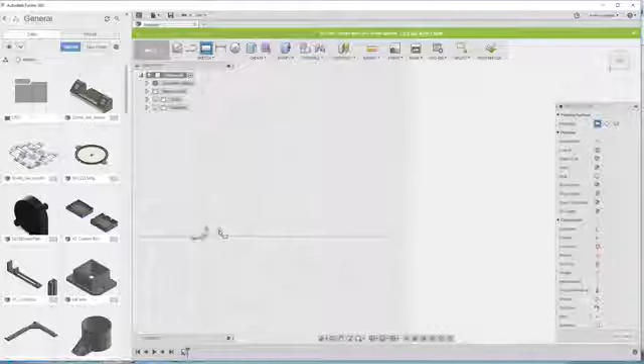First thing I'm going to do is change my document settings. I'm going to set it to inches. That'll make things a little easier to sort out.

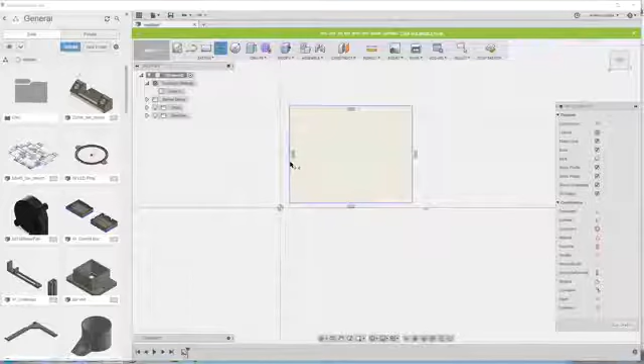So I'm going to use my dimension tool for the rectangle I've drawn, and I'll click on the left side. I have an XXL, so maybe I want to make a 30-inch by 30-inch wasteboard. So I'll type in 30 inches there, and I'll click on the top line here, drag up a little bit, and type in 30 inches here.

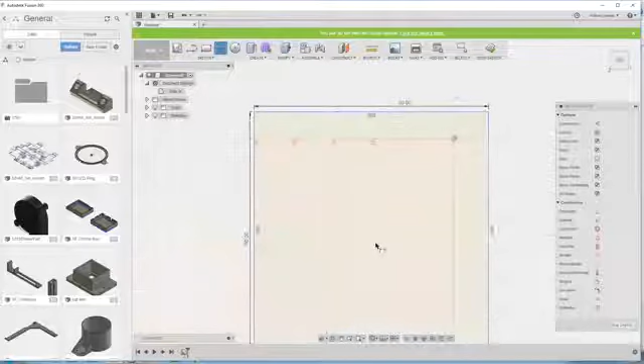So I've now created a 30-inch by 30-inch square. This would be the size of the piece of wood you've already cut in this example. I'm not going to show how to mill that down because it's pretty much the size of the full bed.

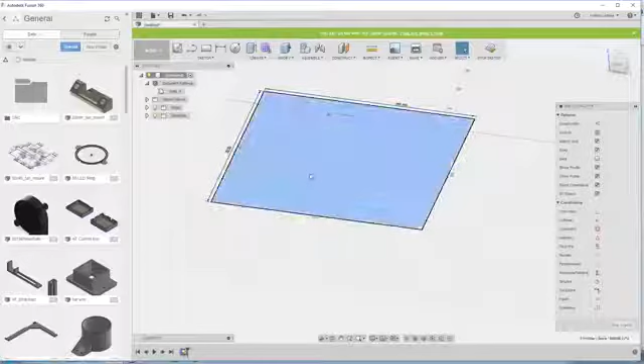If you then click inside of that sketch, you can right-click and extrude. I'm going to extrude it 0.75 inches, assuming a 3/4 inch wasteboard. You would obviously, if you had a 1/2 inch wasteboard or an inch wasteboard, set it to whatever you want. So there we go.

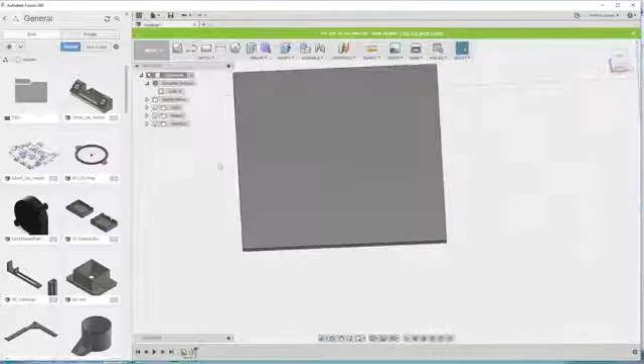That's going to be my wasteboard. Now the obvious question then is, how do I create these circles so they're regularly spaced?

You could, let's see, so we're going to create a sketch on this face. I just clicked the sketch button, clicked that face, and now I'm sketching on the top of the wasteboard.

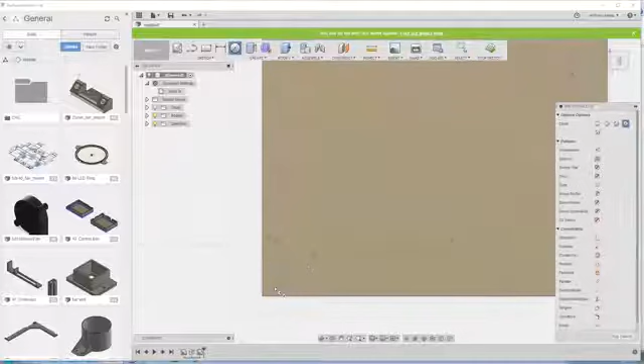Now, if I wanted to, I could draw a circle, come down here, say okay, I want it right here. I want it 9 millimeters in width for the drill bit I'm using, and then draw another circle, come over here, I want it 2 inches away, and say 9 millimeters in width, and draw a bunch of circles.

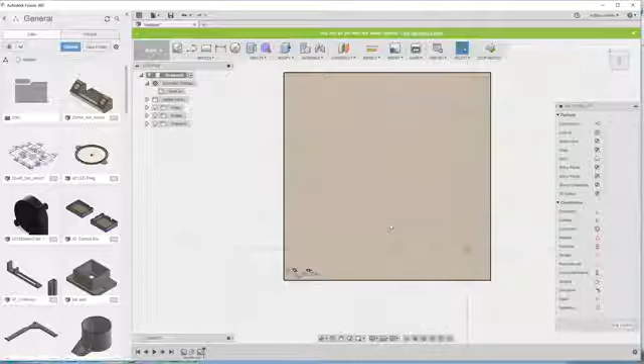But let's face it, there's going to be like 250 circles. Nobody wants to do that. So I'm going to hit back. I'm just going to leave it at one circle.

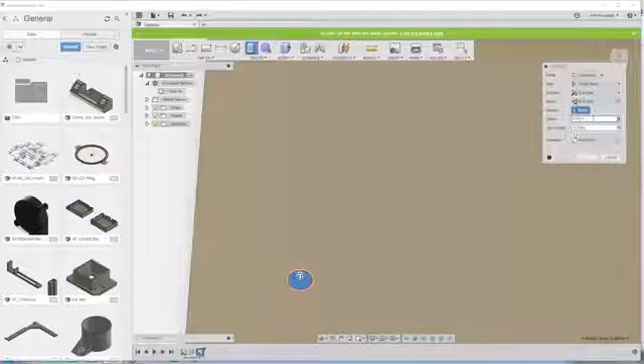And I'm going to click on that circle and say extrude. The extrude menu pops up, and where it says extent, instead of distance, I'm going to select to object. I'm going to zoom out a little bit here, and we'll select the bottom of the board and say OK.

And there we go, I've got a circle that I've created that goes all the way through. So now I've got a hole through my wasteboard.

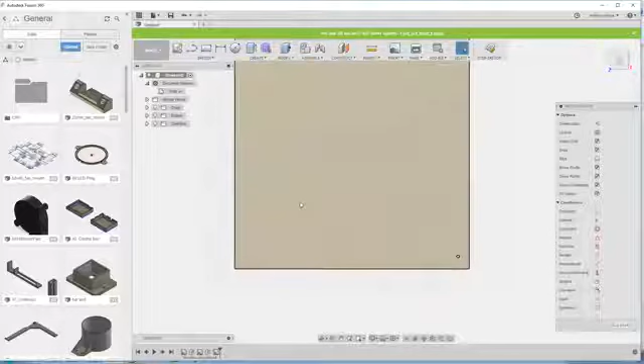And I want to go back and create a sketch on that. So this is my same drawing, same object. Just for whatever reason, it decided to turn it on me. But this is my board that I'm going to make, but now I have this hole all the way through it.

I'm going to go to Sketch, and I'm going to choose rectangular pattern. Rectangular pattern is exactly what it sounds like. It's going to make a pattern of selected objects in a rectangular shape. So you select your distances and that kind of thing, and you just use that to create recurrence of the same item in a rectangle.

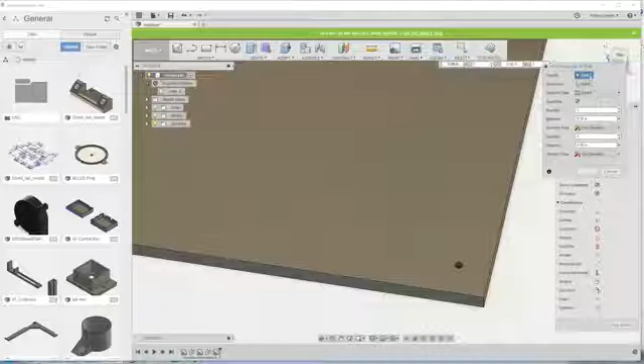So here's my rectangular pattern. Objects - the object is going to be your circle that you want to create. Not exactly sure what suppress does. That's okay.

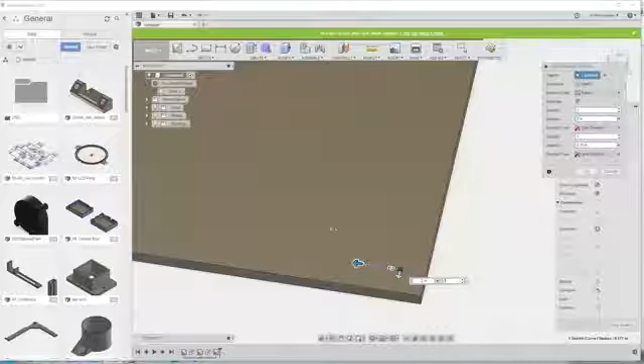So you tell it how many you want to do and a distance. In this case, with something like inserts into a wasteboard, the quantity I don't know yet. I'm not sure if I'm going to need 3 or I'm going to need 30. It's probably somewhere right in between that. But for now, I'm just going to not worry about the quantity, and I'm going to choose distance, and I'm going to say I want them 2 inches apart. So my spacing for my holes, that's, if you hover over it, you can see. It should show me.

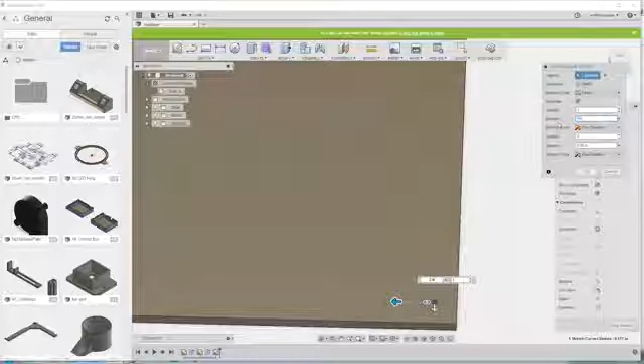Nope, it's not giving me a tooltip here. That should be the spacing in between, I believe, each hole. Maybe not, I just did this recently. Nope, that's the total spacing. So I want to go 29 inches over.

More than an inch off the side. Yeah, I'm about 1.5 inches off the side. So 30 minus, yeah, I want to go about 27 inches, get it nice and evenly spaced. So there we go, I've got it set at 27 inches, and it says 3 holes.

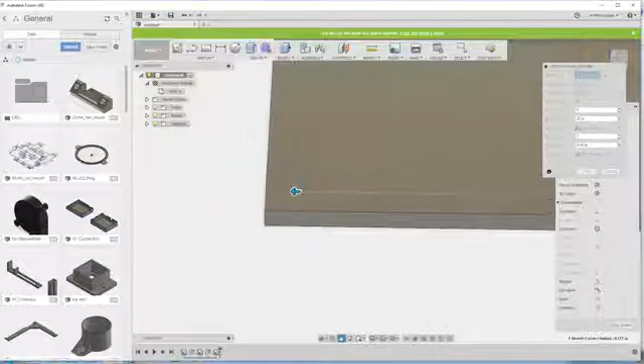So you can see it's got 1, 2, and 3. So now I can just change that and say maybe I want 15 holes across. If I can type the 15, and it'll show me what it's going to draw. And then on this one I would type the same - I want 15 holes, and I want it to go 27 inches.

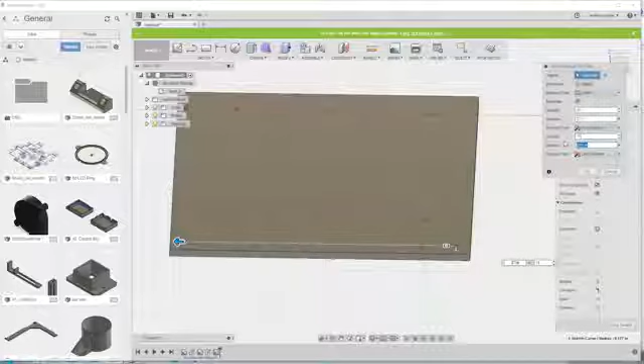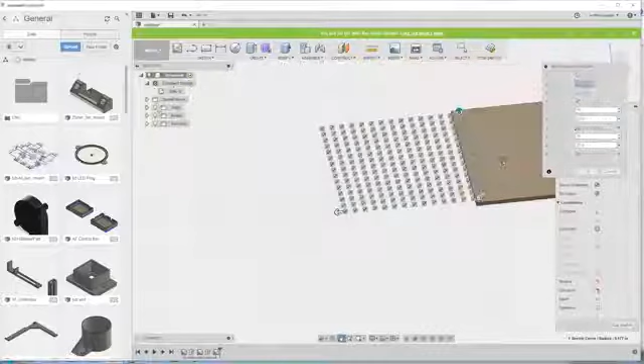Now you can see it went the wrong direction, so I need to select which direction I'm going to go. I believe I do that by clicking. Let's see. Oh, right here. So yeah, you can just type in a -50 or -27, the opposite direction. There we go.

So I have an array now of 15 holes in each direction, 27 inches total. So I'm 1.5 inches off of the walls.

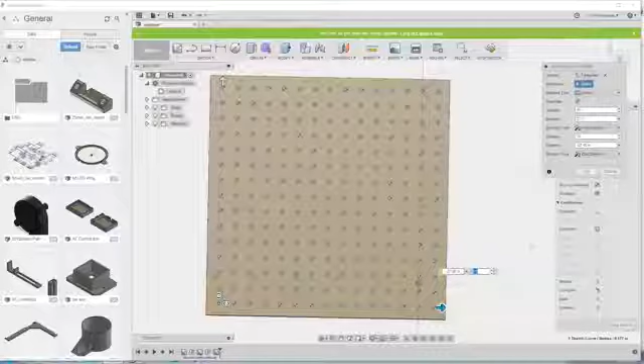Personally, I would probably change this. So let's go ahead and cancel. Before I do the actual extents, I'm going to decide, you know what, I want to go back and change that hole. I want to fix the spacing of that because I just kind of randomly drew it.

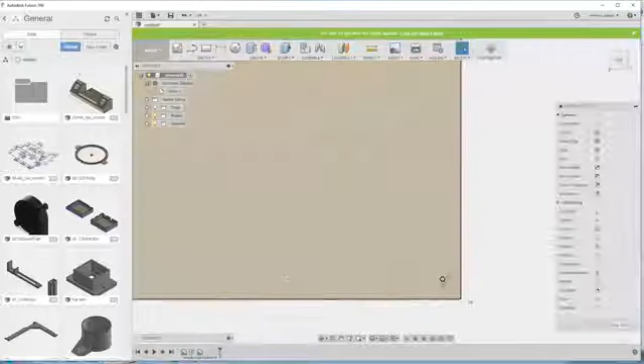So I'm going to go back to this previous sketch. I'm going to right click and choose Edit Sketch. I'm going to add a dimension real quick and say I want it 1 inch off of this wall, and 1 inch off of this wall. So just dimensioning that, now it's nice and square, 1 inch off of each side.

Stop sketch, click forward to my sketch where I'm going to do the pattern. Go to Sketch, Rectangular Pattern. Select that object again. Now I want to go 28 inches.

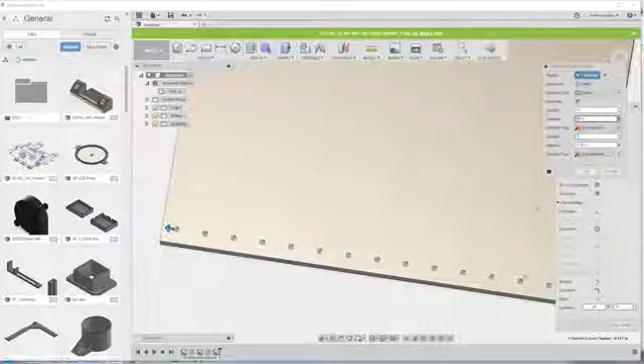It's going to be minus an inch on each side. I want 15 of them. And then for my other direction, I want 15 again, and -28.

And there we go. So however you want to do it, as far as spacing, quantity, that kind of thing, you just type those in, play with it. Symmetric does it in both directions - you wouldn't really want that in this case. And say OK, and it creates all those holes.

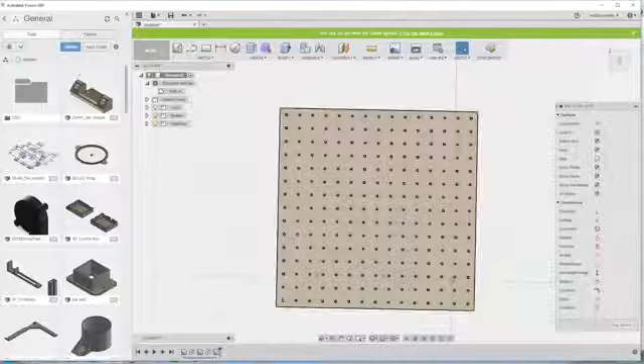So now I have, what would it be, 245, I think. My math is right. 225, so I have 225 9mm holes. Great, so there's my spoil board.

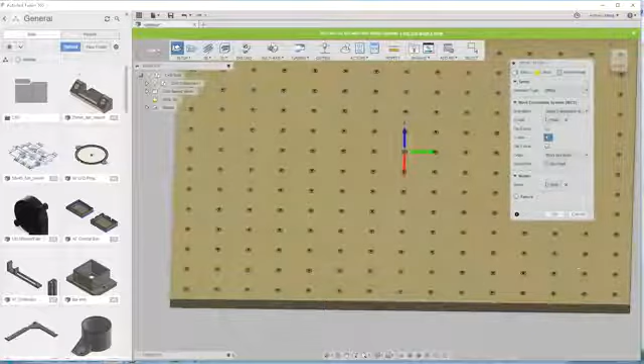Now I need to switch over to the cam view. So go to Model, Cam. Again, in our setup, you're going to click New Setup. Operation Type Milling, Orientation, just like last time I'm going to say Z-axis. Click the top, X-axis, I'm going to click. It really doesn't matter because it's all symmetrical, but just so it's oriented the way I think it should be, that side.

And I'm going to say stock box point. I did click over there. It's not showing me my stock box points yet. Sometimes it, for whatever reason, doesn't.

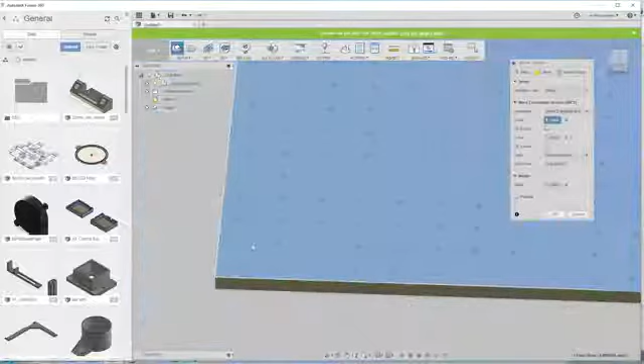In this case, my stock is going to be exactly the size as this, so I'm going to leave it at relative box size and just say 0 all the way down. Now if we click back over to setup, it should let me select. Oh, I had the wrong thing selected.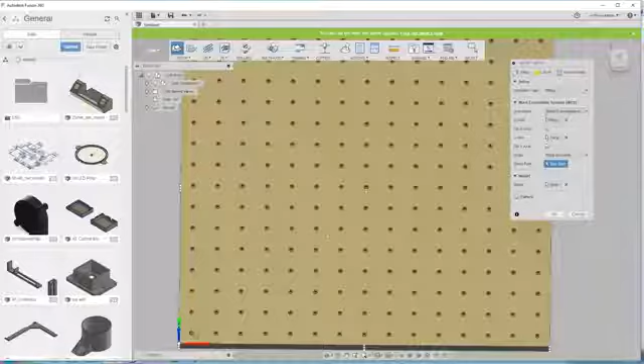Here we go. So now I've selected my origin as one of the corners. So z-axis, I just selected the top face, x-axis, the right face. I set my stock to be the exact size of my board and selected the top of this bottom left corner here. I'm going to say OK.

So now I have my stock set up. So the only operation I'm going to need to do here is to cut out all those holes. Okay, I'm going to be up front here - the best way, the right way to do that is with a drilling operation.

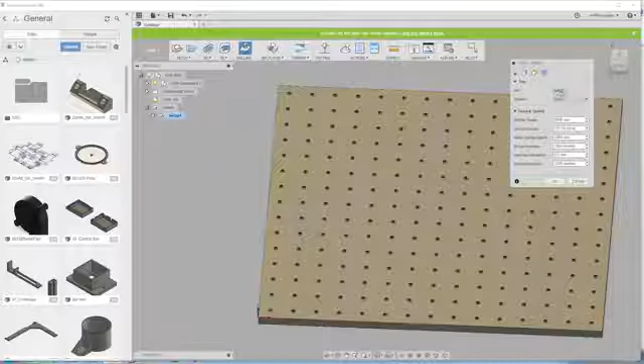So you would click drill. You would want to use, in this case I did 9 millimeters, you would want to use a 9 millimeter drill bit. That's the ideal way to do this, and it's the proper way to do it. I don't know about you, I don't have a 9 millimeter drill bit, and I also don't have a 9 millimeter collet for my Shapeoko router. So that's not going to work for me.

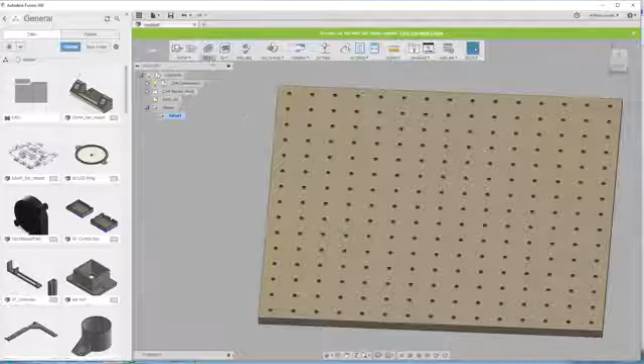What you can do instead, and it's not good for your end mills, but you can do this, is to go to 2D options and click circular. I would use 1/8 inch or a 1/4 inch end mill - either one technically would work. Wait, I'd probably use the 1/8 inch. I think 1/4.

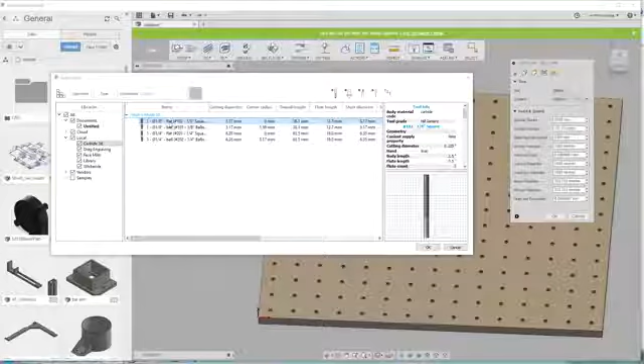Yeah, a 1/4 inch is about 6.35 millimeters. Exactly, so that would technically work, but I think the program is going to bark at you if it's quite that close. But you could try it. Here, let's just go ahead and do it. It would go a lot faster if you could.

So 1/4 inch flat end mill. Say OK. Your entire cut at this point is, I mean, yeah, it's gonna be doing a little bit of circular motion, but most of it is gonna be ramping or plunging.

So when you do your feeds and speeds for this, whatever you do them at, if it's 75 inches per minute, go pretty conservative on your ramp and your plunge. I'd do something like maybe 33 inches per minute. Don't take that as gospel, use whatever your end mill would call for.

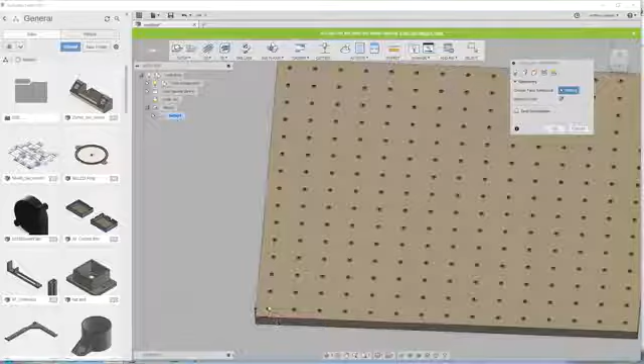And then circular face. That's where you choose your hole to drill.

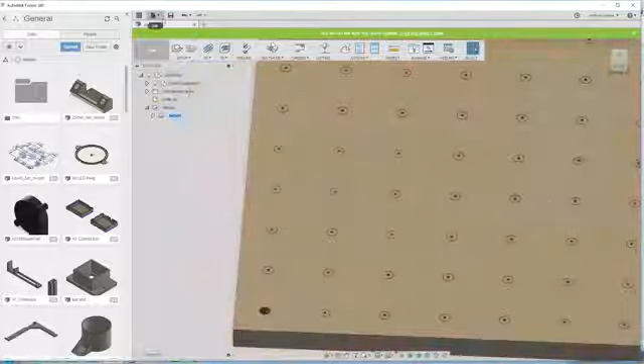I thought there was a way you could optimize it. Oh, I never extruded those. Okay, so we're gonna hold off right here. Little minor detail.

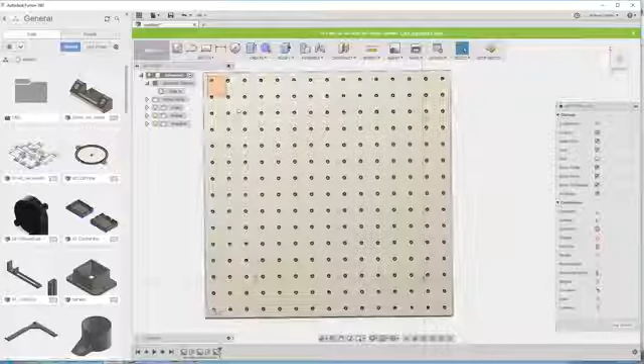Gonna go back in and edit this sketch. Oh, I'm already editing that sketch. I never finished it. So if you have this large number of objects like this, you can actually just click and drag to select them all. And I missed just a few down here.

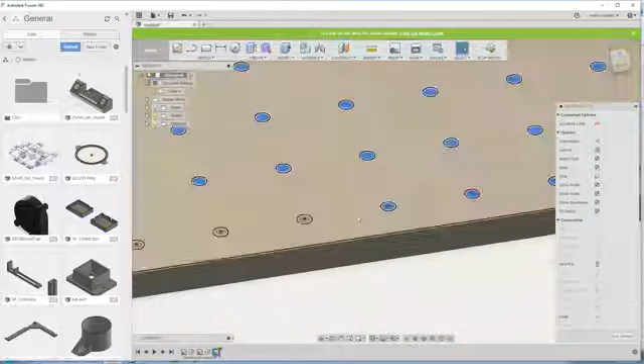So I'm gonna hold down Control, select these last few holes here that I missed. I'm going to right click and extrude. Again, I'm going to go to 2 and select the back of it. Little minor detail I forgot.

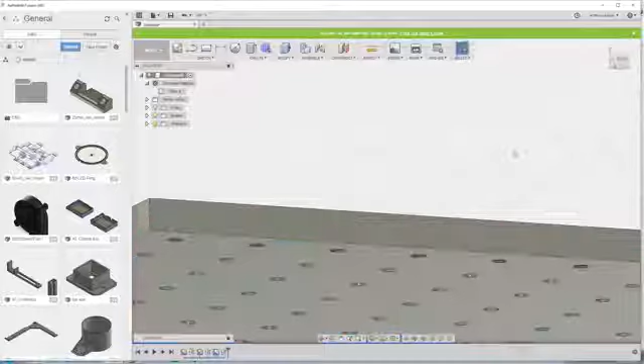And there we go. Now I have 225 holes through it instead of just a sketch of some circles. Back into CAM, 2D circular.

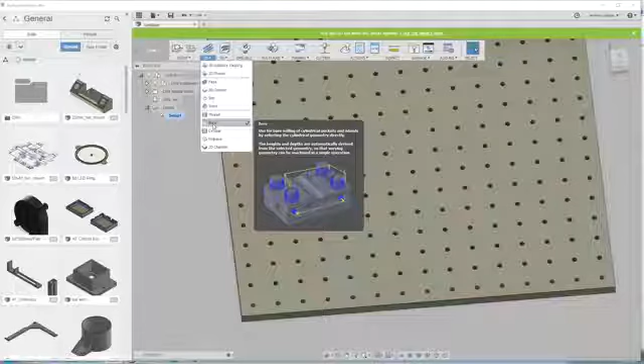Not sure the difference between bore, but I've used circular to good success. So again, select your tool. I'm gonna gamble that the 1/4 inch is gonna work. You can see it's a good portion of the size, so that probably isn't the best choice.

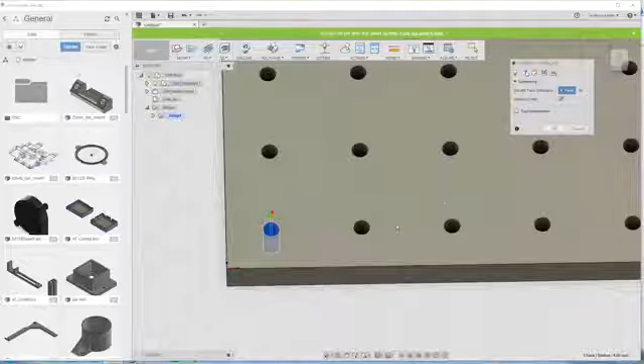And let's see if I can... nope, I can't click and drag. I thought there was a way to apply it to all of them.

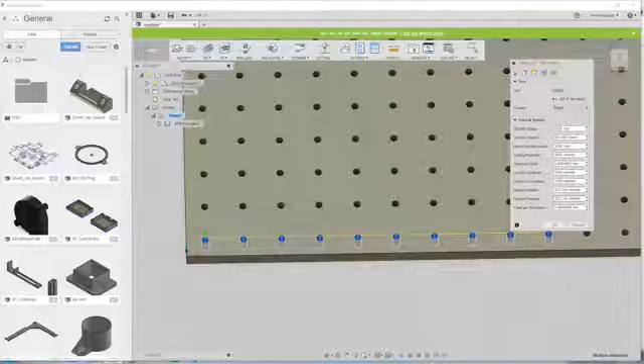I saw somebody post a trick for how to do that, and I'm not finding it. Might have been a plugin, I think it was. But you'd go through and click on all of those. Under geometry, so you just gotta click each face, I guess, without that plugin. I'll see if I can dig that up or find the video that shows how to select them quicker.

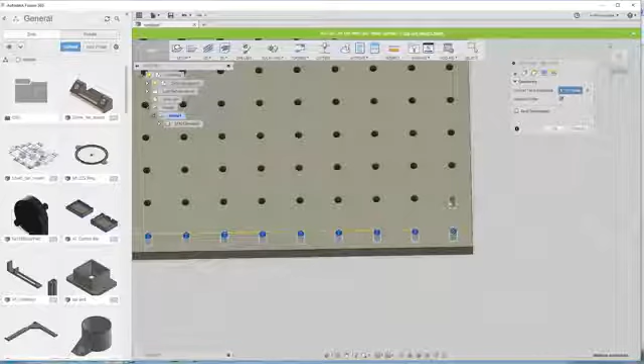But it's not too horrible. You just gotta left click on each one.

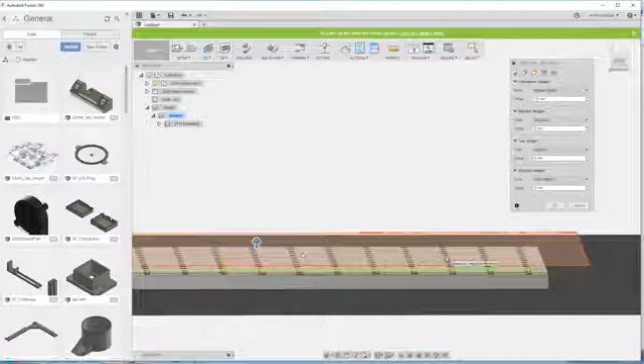Heights, again, this is your retraction height, top of the model, all of that. Honestly, for this operation, you're not going to need to adjust it as long as you set your Z height correctly, and you're not holding this down with anything other than like tape. If you're holding it down with anything that the end mill is going to run into, you need to change it. Really your retraction height is the key.

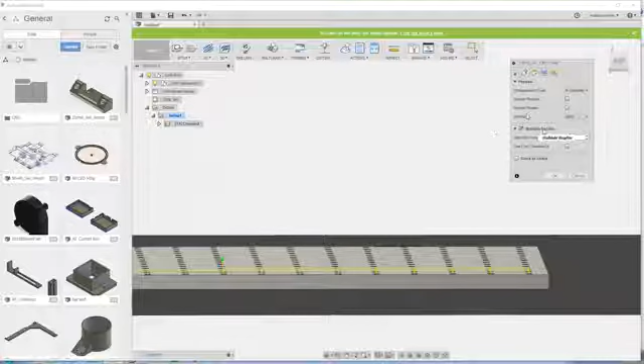Passes. Okay, so this is where we get into here's how we are going to bore these out, drill down into them. You're going to want to set a maximum roughing step down, and I would probably go with something like 0.1 inches. So it's going to do 1/10 of an inch, clear it out a little bit, and then it'll actually pull back up in between each one, which is pretty handy.

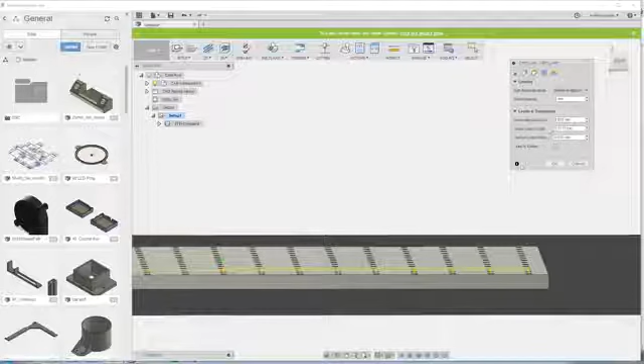And then really that's it. There's not much else to this. You're not going to want to use stock to leave. You could use even step downs and set a more generous step down distance. I wouldn't.

Direction, climb or conventional, that's going to be up to your end mill and how you're doing your calculations. Either is fine on that. I'd probably use climb for something like this on the Shapeoko. Repeat or multiple passes, that's a way to clean it up a little bit, so you're not doing the whole entire hole at once.

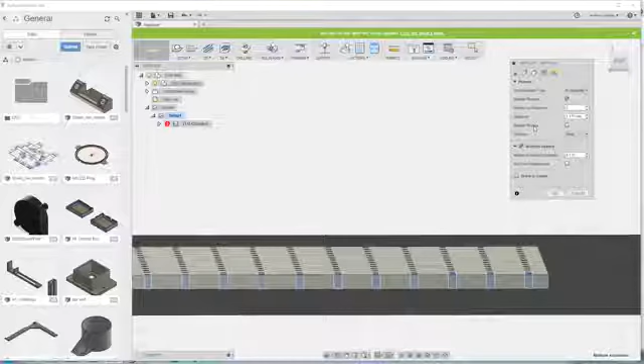I wouldn't use that for something like this. You're going to leave it where you just need the multiple depths and some reasonable roughing step down. And you're going to say OK.

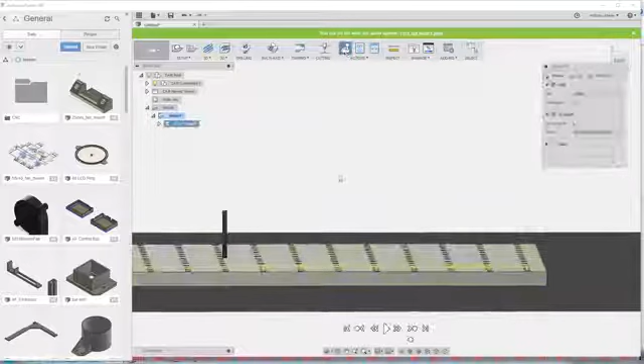Now if we click on our setup and simulate, I want to enable my stock so I can see it. Turns to that nice green color. And I want to change my tool path to tail.

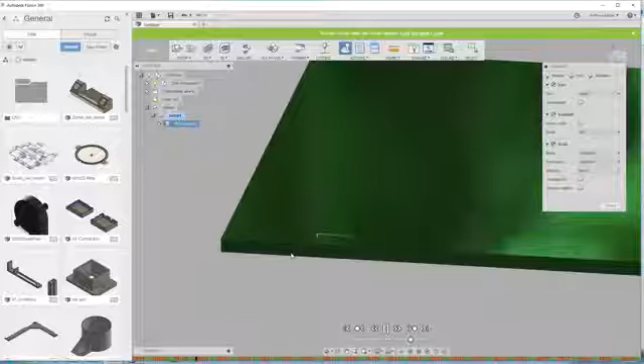If I hit play, you're going to see it does something called peck drilling automatically. You can see here in the video that it's actually going in and out each time, so it'll clear out all that sawdust each time it goes, and it'll just go through each one. It'll optimize its order as it goes. That was one of the options there.

I believe it's the default. Yeah, optimize order is checked. So as you go through and select more of these, it'll figure out the best pattern to go through.

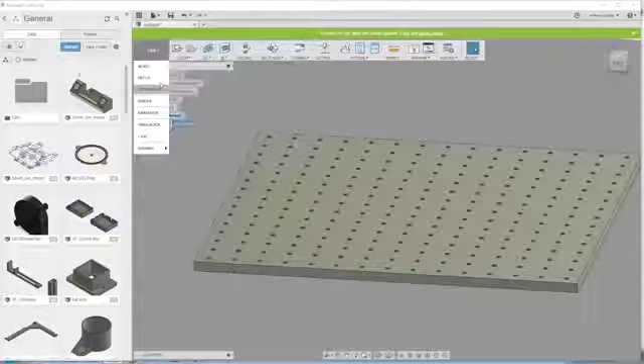Really, that's all there is to doing a wasteboard. Now if you wanted to add a chamfer to that, you would do the exact same process. You would create a circle, sketch on this top plane, draw your circle, and do it at 12 millimeter distance, or whatever it's going to be, 12.5 probably.

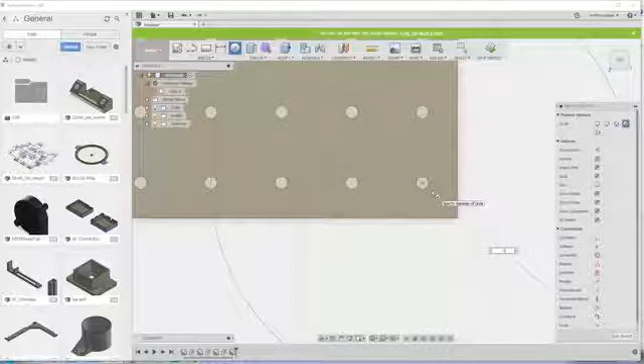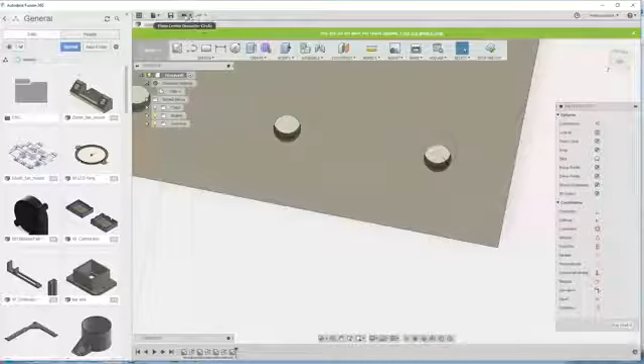And 12.5 millimeters. There we go. Now I got a circle on the top of it. I'm going to right click, extrude. I want a 2 millimeter chamfer.

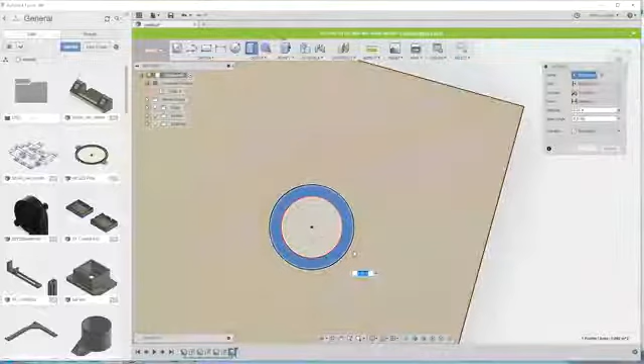And you would, oops. First of all, I want to do negative. And I'm in inches, so I got to manually type in millimeter. There we go. So there's my chamfer I've added in through software.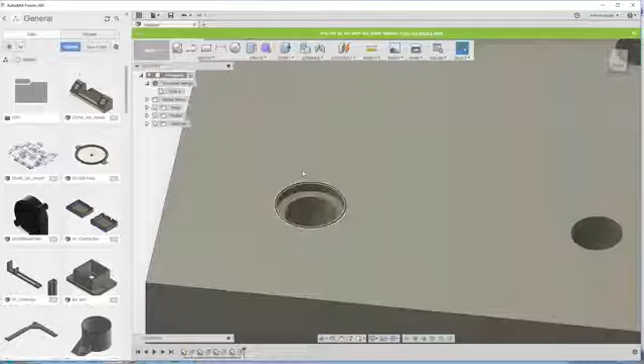And then you would go sketch, create a new sketch, sketch rectangular pattern again. Select that outer circle and type in the exact same settings as you did before, 28 inches, and you want 15.

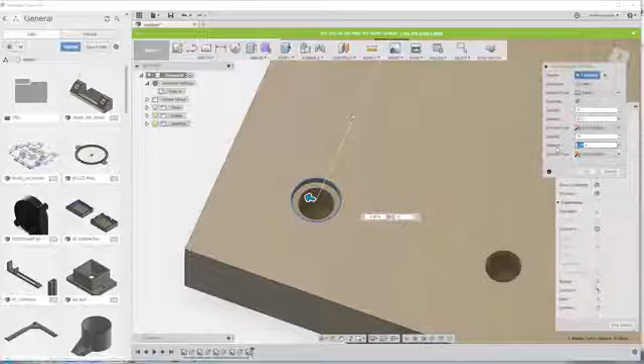15 inches, and that's the way I decided to orient mine.

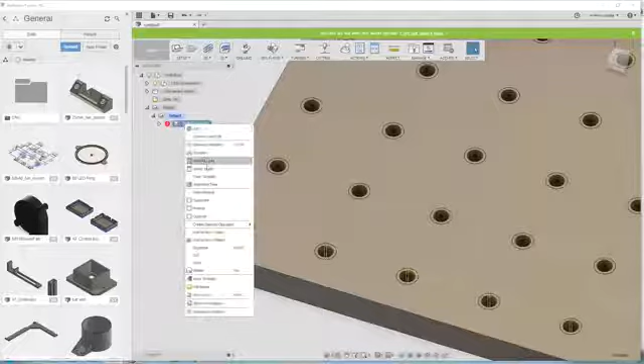So now I've added a chamfer to that. Now if I go back over into CAM and I generate my toolpath over again...

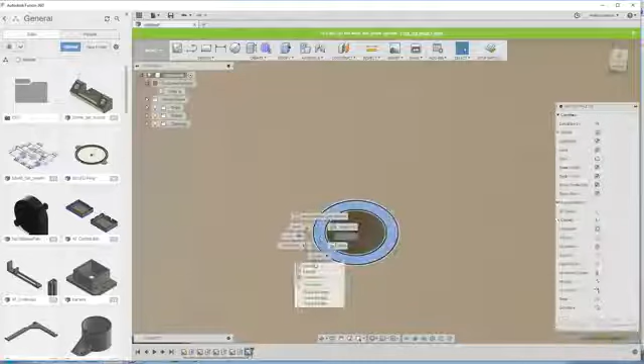You're going to see it's not going to cut. You would have to go through and extrude that chamfer on all of them. But before I do that, in the model, you'd have to go through, select each one, extrude, select them all, and then extrude a negative 2 millimeter. So you would have to select all of those. I'm not going to do that to keep the video short.

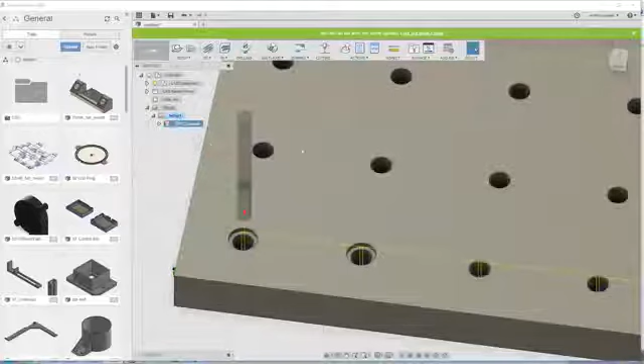Under CAM, then, if I generate this toolpath and simulate it and start, you're going to see it's not going to recognize that top hole. It's going to move on without doing that.

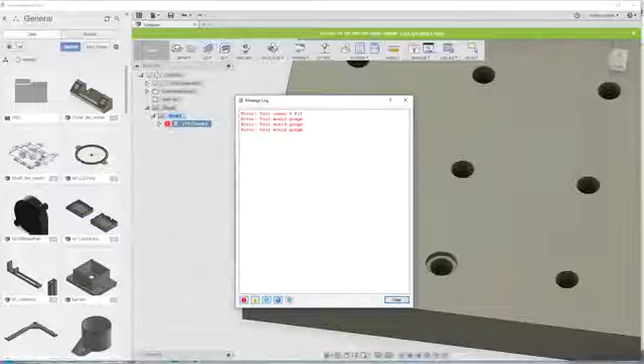So what you actually have to do is select that geometry as well. So you have to select both. And it didn't want to do it. Let's see what warning - tool doesn't fit, it would gouge.

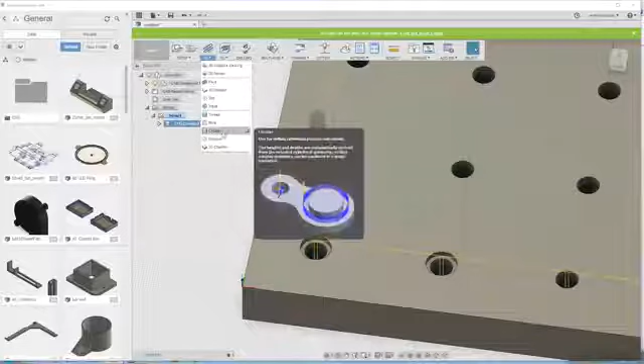So it doesn't like that. So if I select that one, get rid of it, say OK. What you may have to do is the second circular - I'm actually going to move it. Yeah, I can't move it yet.

Same tool is automatically selected. I'm going to select just that chamfer and say OK. Now I'm going to move that up, so now the new one with just the chamfer would be first.

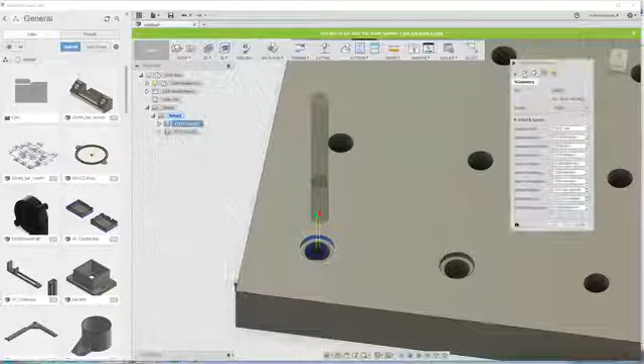Now I can quickly select. So I would select all of the chamfers and run those.

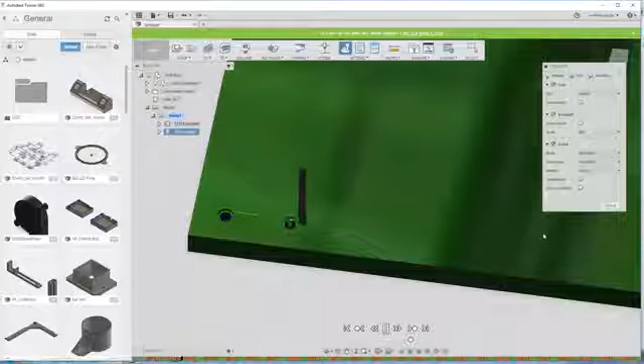And it would run through and do all the chamfers, and then it would do all the holes all the way down through. So at that point, you'd be done. You'd drive your T-nuts or your inserts if you're using the EZ-Lok inserts.

Flip your board over and bolt it down. You might want to, as you're doing this process, go ahead and add some bolt holes to hold it down or whatever. But anyway, that would be pretty much it.

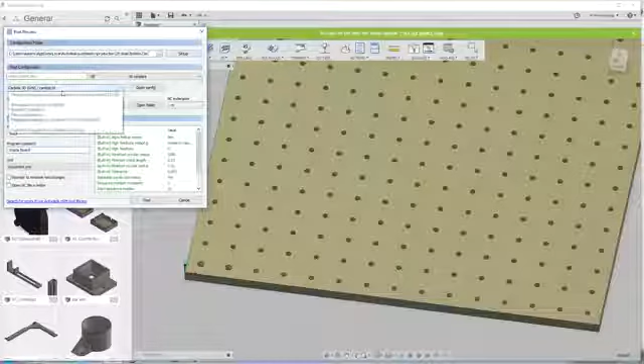And then once you're done, post-process, change the comment, make sure Carbide 3D is selected and hit post.

So hopefully that's helpful on how I would do a wasteboard and have a nice evenly spaced layout for exactly how many holes in each direction you want.